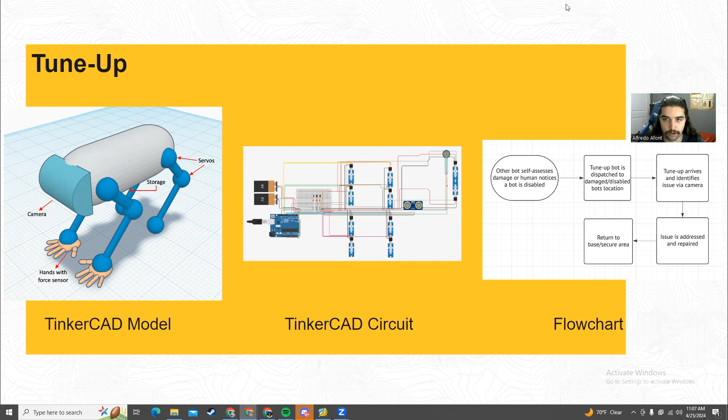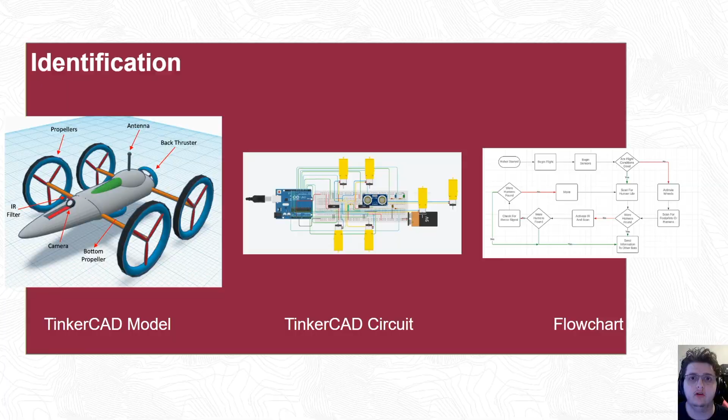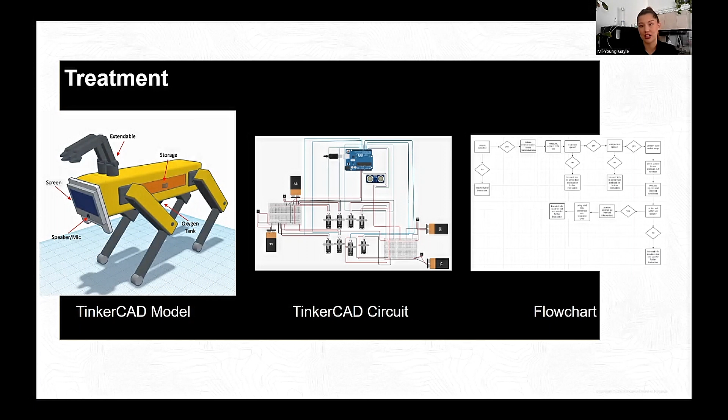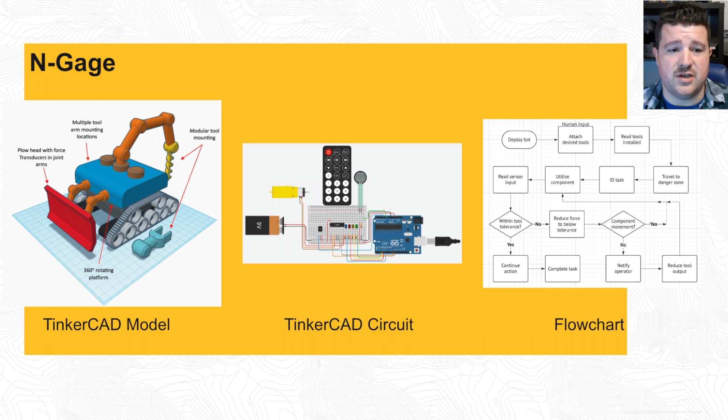The main algorithm of the N-Gage bot employs force sensors located at hinge points, actuators, and the tools installed to ensure forces applied do not exceed tolerance levels. If too much force is applied, the tool will slow until the force returns to within tolerance levels, ensuring bot survival and continued operations. Here we see all 5 bots in the swarm in a forest fire setting.

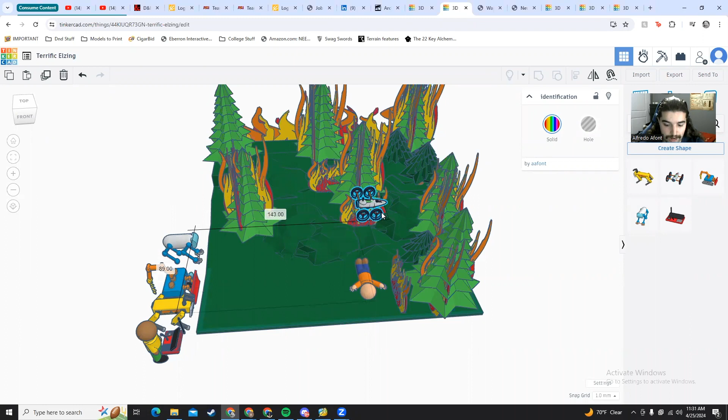The admin bot down here is coordinating efforts between rescuers and the bots. The identification bot, currently in the air, is flying around to find a victim. Say it finds a victim right down here, it will then notify the admin bot, and the treatment bot will be deployed to the victim to help them out. The N-Gage bot will then move to find any potential hazards, such as this fire, behind the victim, and then it will just move to keep the area secure, keep the rescuer safe, and keep the victim safe.

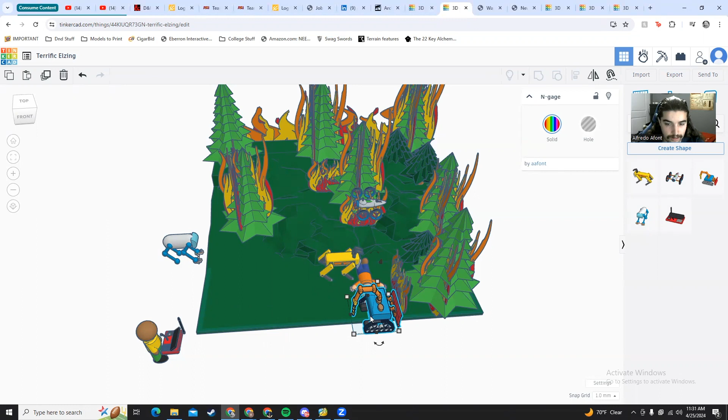Say the N-Gage bot then has a tool break on it. The tune-up bot will then be deployed to go to the N-Gage bot, find the tool that's broken, repair it, and then return back to a safe area.

Competing solutions within the search and rescue space include helicopter rescue, search and rescue dogs, and search teams. Helicopter rescues carry an accident risk which may be fatal to rescuers and/or victims during both active flight and when powered on the ground, and are limited by requiring fair weather conditions which deem them safe to fly.

Our solution employs a drone-like bot called Identification, which facilitates surveillance and search operations autonomously without risk to rescuers. Search and rescue dogs require years of training, often specialized to one type of searching, which reduces the ability to utilize them in multiple capacities. These types include disaster, tracking, wilderness, avalanche, and cadaver.

Our swarm solution is easy to use and accounts for multiple disaster scenarios without requiring extensive training, nor resources beyond the bots and human rescuers. One example is the modular component feature of our N-Gage bot, which supports traversing harsh snow, mountainous, and fire conditions.

Search teams similarly require extensive training and often require extensive manpower to facilitate multiple search parties, and are limited by human capability. We've designed a total of 5 collaborating bots, which are limited only by their battery power, where each fulfills the roles of multiple members of a search team.

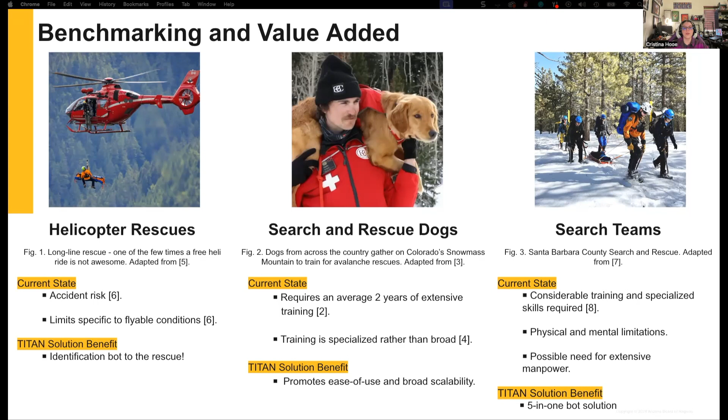Our system is a multi-pronged solution that confronts various conditions within a search and rescue environment. The solution satisfies the requirements with the following bots: Tune-up, which can repair all other bots whenever necessary; Identification, which can identify victims grounded and aerially through various methods; Treatment, which can transport life-saving equipment and enable communication between both rescuers and victims.

Administration, which can coordinate all the other bots and facilitate communication between the bots, rescuers, and victims; and N-Gage, which can clear the way for the rescuers and other bots in order to quickly and safely reach the victims. Our system allows rescuers to focus on what really matters: quickly saving victims with as little risk as possible.

As you can see, we utilized numerous sources in order to better understand the problems that surround search and rescue and various natural disasters.